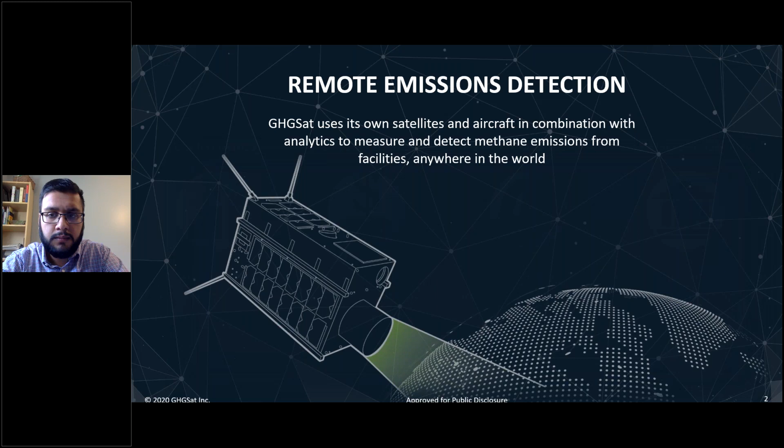As you can see on the screen here, we have a focus that lies between analytics and then our own satellite and aircraft-based platforms. But before I get too into those, maybe just a quick note on why measure methane emissions in the first place, to sort of set the stage.

First of all, we like to talk about economics. I think in most of these types of discussions, obviously if you're in an oil and gas type environment, you can capture the gas and put it into a usable system and sell it. But there's also other applications, things like landfills looking to capture gas from their landfills and either use it for injection or sometimes to power their vehicles, applications in agriculture, or even in some cases there's business centered around carbon credit generation. So there's a whole bunch of different economic aspects to why you might want to measure methane emissions.

Further to that, and on that same theme, is the idea of investors. So when we talk about large capital projects, oftentimes there is an increasing pressure for more disclosures as they relate to risks relating to carbon intensity and that type of thing, up front. And so that could be another reason.

And third, is health and safety. Unfortunately, every year there are events that happen where people die because of natural gas explosions, whether it be leakage into a basement in a rural area or say a coal mine explosion.

And the third idea about why we might want to measure deals more with regulations and the idea of where there's taxes and levies being applied in industry. There's certain value in actually making a measurement rather than say using an inventory-based approach to determining what emissions are.

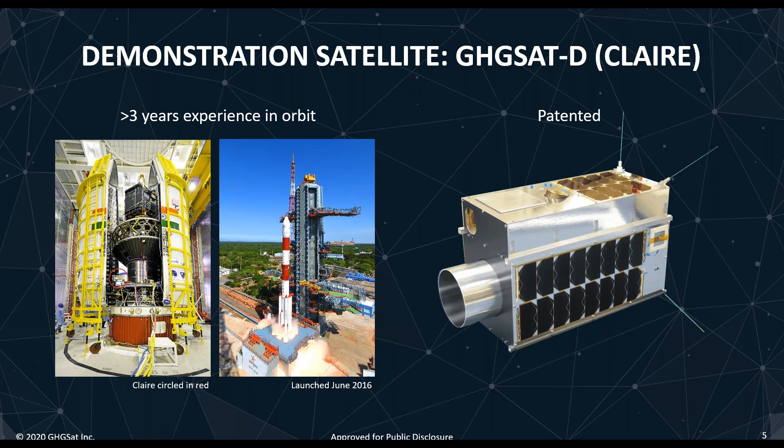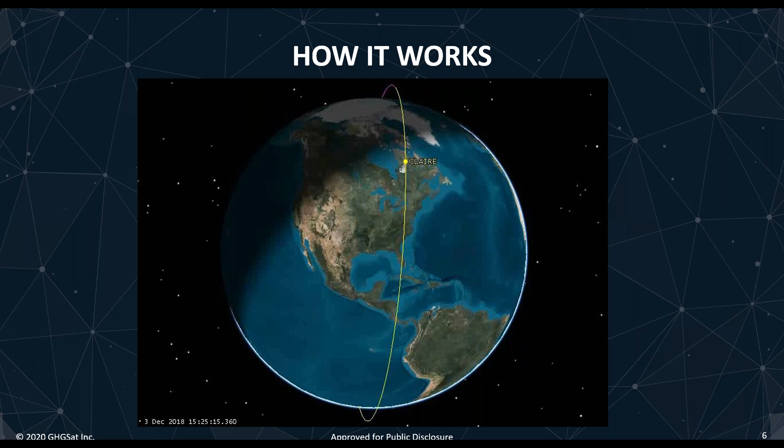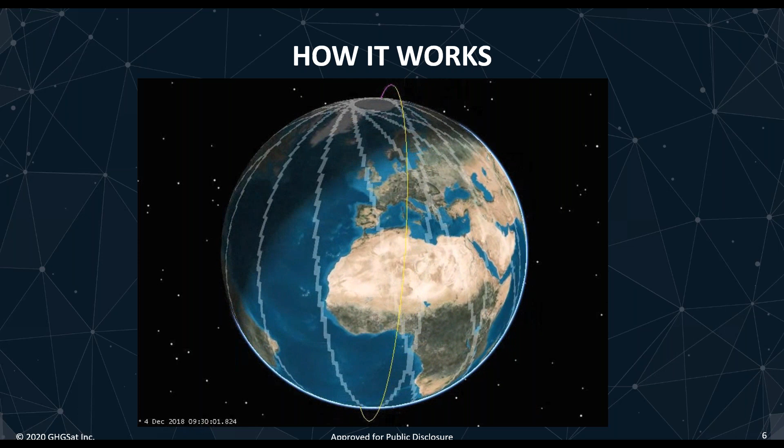Moving on from this, there's the satellite, but how does it actually work? I've got a quick animation here. We launched our satellite into about a 500 kilometer altitude orbit that runs north-south around the Earth. You can think of it as running north-south as the Earth spins west to east underneath it. That gives us access with the satellite to anywhere in the world once every 14 days or thereabouts on average. It depends a bit on where you are on the Earth, but once every 14 days is a good estimate.

With that capability, as we travel overhead of a particular site, we take basically a 20-second exposure image, you can think of it that way, and we capture a 12 by 12 kilometer area over that site of interest. The basic premise here is that of spectroscopy, the science that we're using, and we're using naturally reflected sunlight off the surface of the Earth, so it's a completely passive system.

But what really sets us apart in some ways is our resolution. GHGSat is able to attribute emissions to specific facilities, and with our demonstration satellite we're at about a 50 meter or better pixel resolution, and with the follow-on satellites we'll actually be improving that to 25 meters. I won't get too into the specifics of how it works, but happy to answer questions on that as we go, just in the interest of time.

What I will say is all the images, and I'll show some examples in just a moment, all use sort of a differential approach. What that means is that we take the average background level and subtract it from the image that we have, and that leaves us with what the enhancements are. We're then able to attribute those enhancements to particular facilities that we can see on the ground.

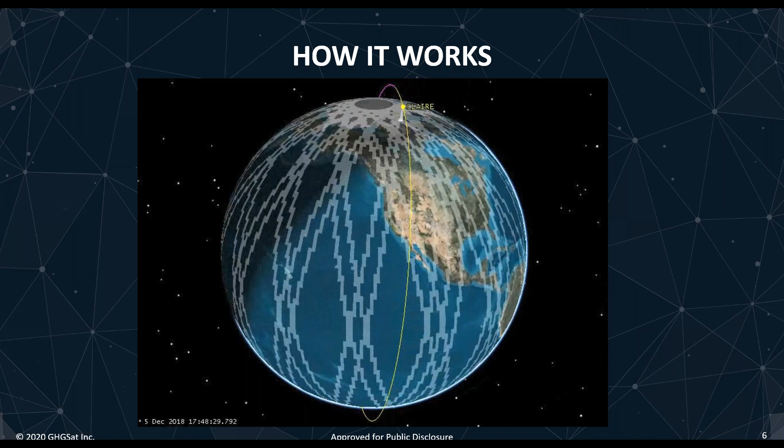Some key advantages of the aircraft are that we're now able to capture methane imagery at a spatial resolution of less than a meter, so extremely high spatial resolution with the airborne sensor. And we have some exciting results I can show you from that as we go forward.

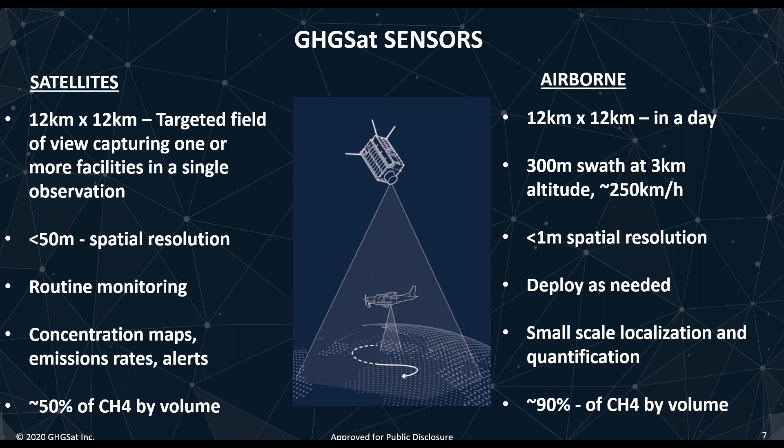That was arbitrary, just to give a sense. The idea is that the aircraft passes line by line over the area of interest and is able to survey, in this case, all of these oil and gas facilities over about the course of a day, while the satellite captures that same space but not necessarily at the same resolution. So while they're both looking for methane, they may be seeing different emission sizes, as well as giving different spatial resolution.

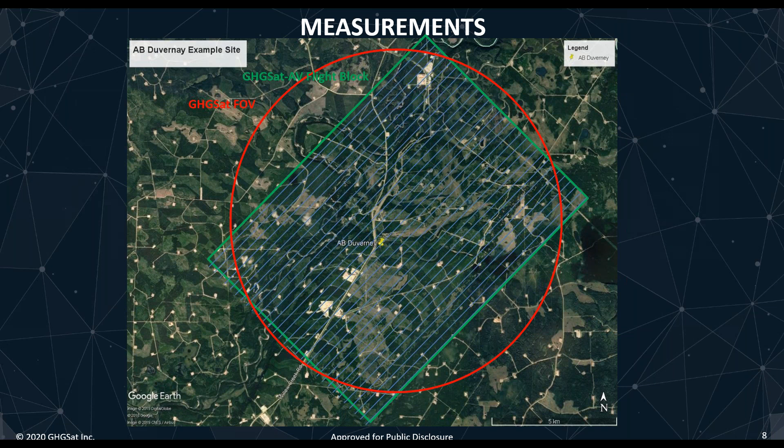What we're looking at there is the ventilated air methane coming out of that mine. They vent the methane from the underground mine for health and safety purposes, to avoid explosions and that type of thing. I think that's probably relatively intuitive.

As that breakdown happens, methane is released through that anaerobic decomposition, but it is then absorbed by the water in the reservoir. So what we're seeing, that highlighted hotspot of methane concentration, is actually downstream, seen in the spillway. When they spill the water out of the dam, that causes the water to degas, and we're able, in some cases, to measure those emissions.

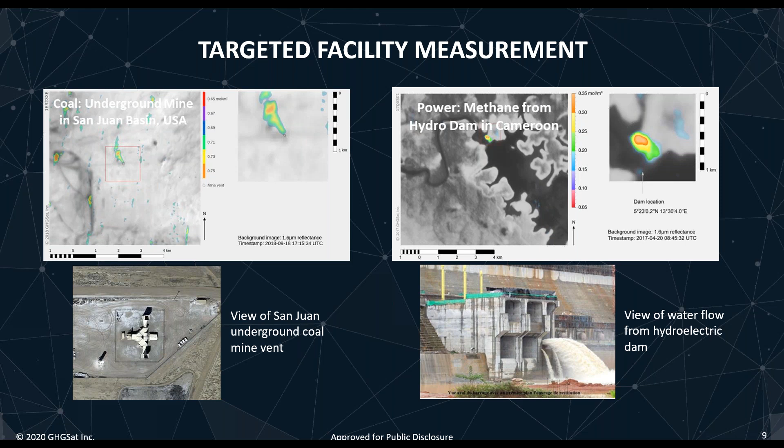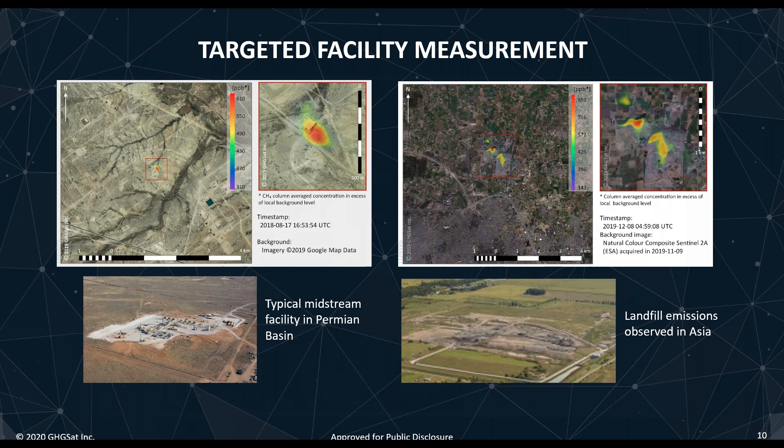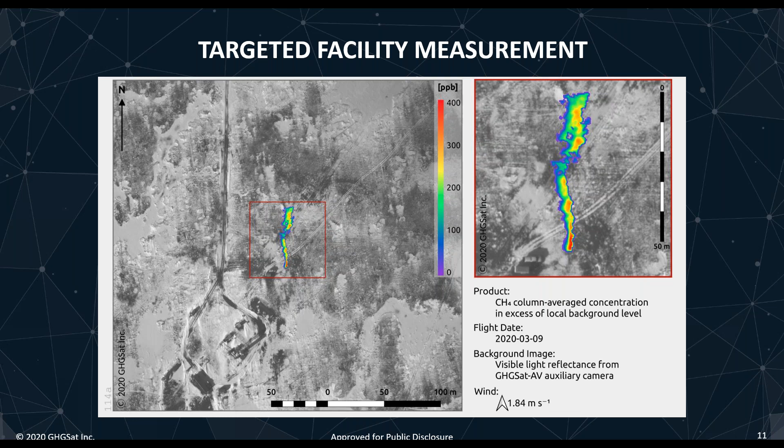So with all the sensors, that's great that we've got that. So what's next? And what's next for us is deployment. Like I said earlier, we'd hoped to share results from GHGSat C1 as part of this presentation. Unfortunately, that satellite has not yet launched. We had a combination of a rocket failure just ahead of us that delayed us, and then we unfortunately had COVID, which caused a further delay.

But the good news is our launch is scheduled for next Thursday, so it's very close and we're super excited about it. I do have links and all sorts of fun stuff available if anyone's interested in actually watching that real time or after. So that satellite's ready to go. It's in French Guiana, ready to launch.

The next satellite, Hugo—again we're sticking with the theme of naming after our children here—is going to launch in 2020. It's almost complete, but the key part here is both these satellites have really learned a lot from our demo satellites, with improvements in resolution and detection threshold being key.

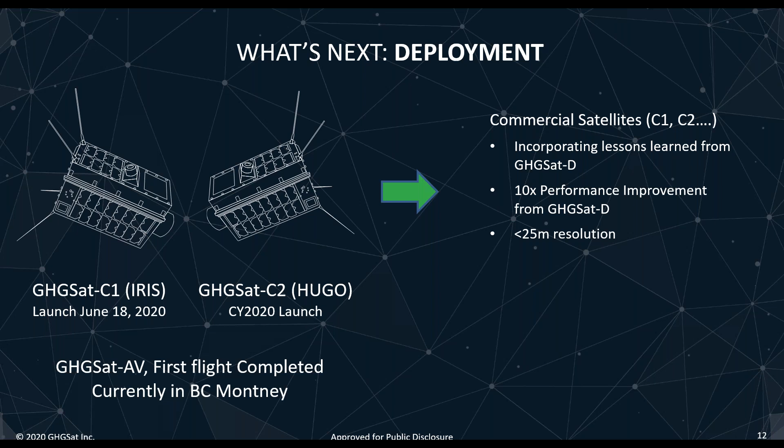And where I started as well was with the aircraft. Our aircraft today is actually out in the BC Montney on one of its first deployments. We did our first flights back in December, but this is one of our first deployments for the aircraft. Like I said earlier, it's got even better detection capabilities than those satellites, of course with the trade-off of getting it to the site and operating costs.

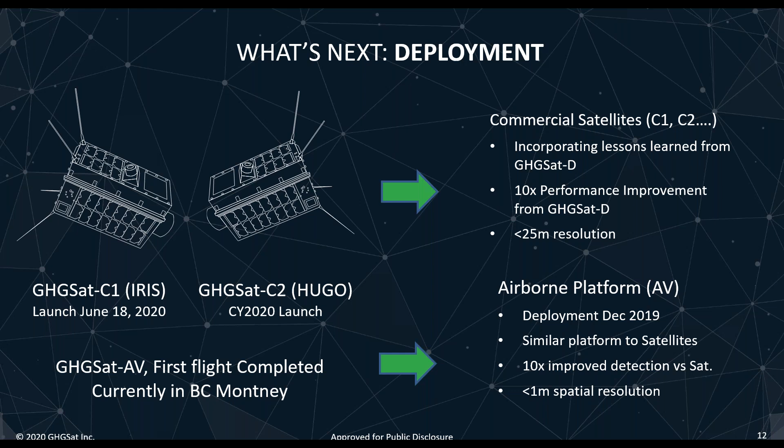What we did was observe these coal mines over the course of about a 2-year window with GHGSat-D, the demonstration satellite. We took those images and averaged them together, and we also rotate for the wind direction so that the wind directions all line up, with the convention being that wind comes from north to south. If we took these 20 images and put them together, that allows us to tease out smaller enhancements of methane concentration on an annualized basis.

It also allows us to reduce the background noise. With that, we're able to determine measured estimates of lower emissions rates than we can detect in a single pass, as well as determine, within reason, what the actual emissions rates of certain facilities are over the course of a year.

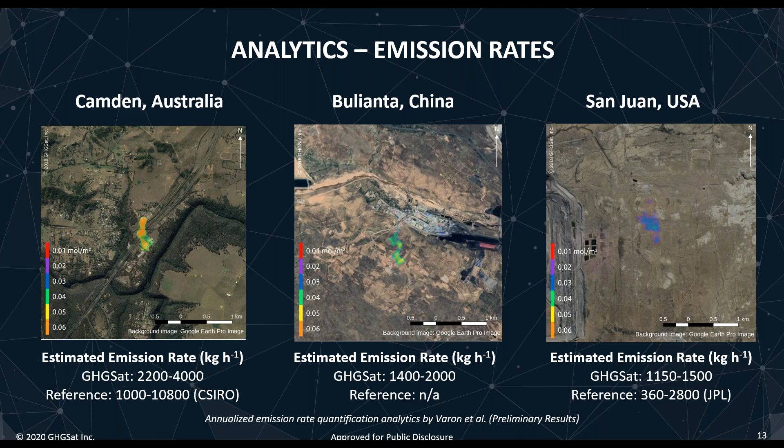Now, that's one of the analytics examples. Maybe a more recent and more exciting one to talk about is from this year. These analytics allow us to provide coverage over very large areas at high frequency, with the trade-off of spatial resolution. One of the things we're doing is looking at data that's publicly available.

That TROPOMI instrument has the potential to capture the whole world once a day. The difference is that the pixel size is roughly 7 kilometers by 7 kilometers, so it's relatively coarse resolution, but it gives us very regular intervals. We can take that publicly available data and put it together to do some interesting things.

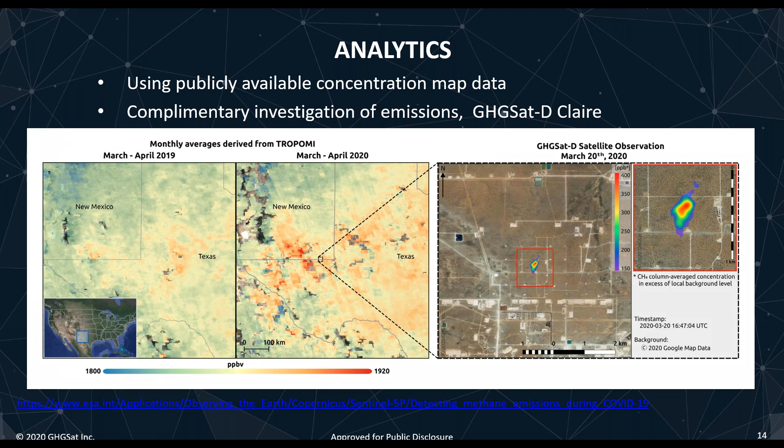But it doesn't stop there—there's more we can do than just take publicly available concentration data. To round out this idea, we can ingest all sorts of publicly available data, including things like visual change detection, weather, flaring, production data, locations of sites, infrastructure, all that type of thing. We can put that into our analytics engine to make intelligent predictions about where to target our satellite.

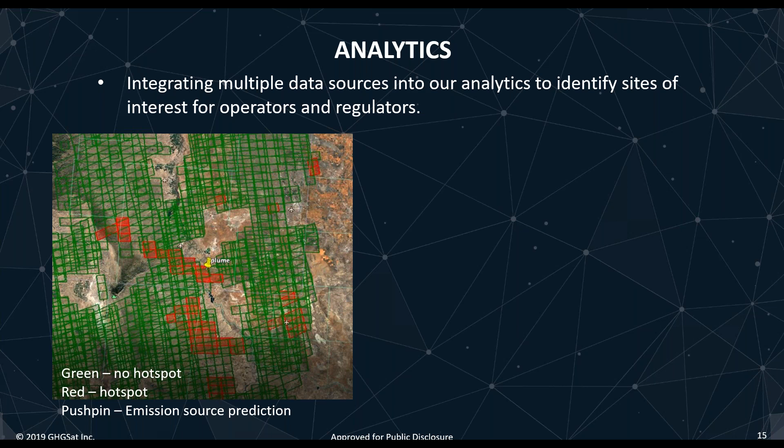In the image you see up in front of you right now, there's a series of red squares distributed throughout, but applying some of the algorithms and capabilities we've developed in-house, you'll see right in the center a push pin that says plume. We had estimated a good chance of finding something there if we took a look, and sure enough, when we did, we were able to find what we believe was actually an unlit flare in that particular case.

So really how this all comes together is it allows us to look from a different perspective at methane emissions, over a very large area at a coarse resolution with high frequency, and then apply that to our fine spatial resolution satellites, and even finer aircraft resolution, which we can deploy on an as-needed basis. Overall, this builds a tiered approach that we can apply across a bunch of different industrial sectors, especially as the analytics continue to improve with the learnings we have as we implement this.

In particular, at the moment, these analytics are of considerable interest to regulatory bodies, as well as to industry when they're managing a large number of assets that are spatially distributed.

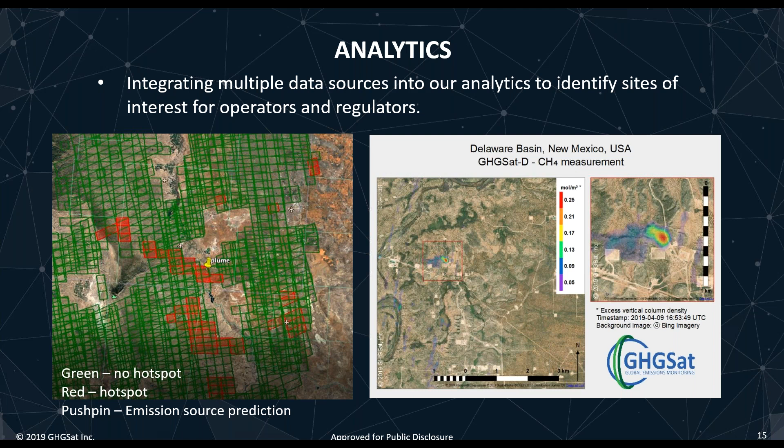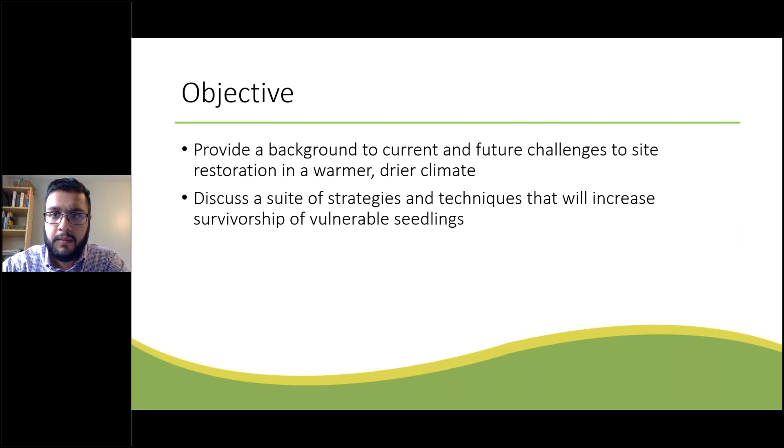I'm gonna try giving them a shout. Thanks, Joe. Good idea. Why don't we go to Anthony's presentation? Why don't we go to the next presentation, and we'll circle back to Jeff? Sounds good, Anthony. Hope you didn't grab a coffee. If you don't mind, Anthony, we're gonna toss it over to you, and we'll come back to Jeff technology permitting.

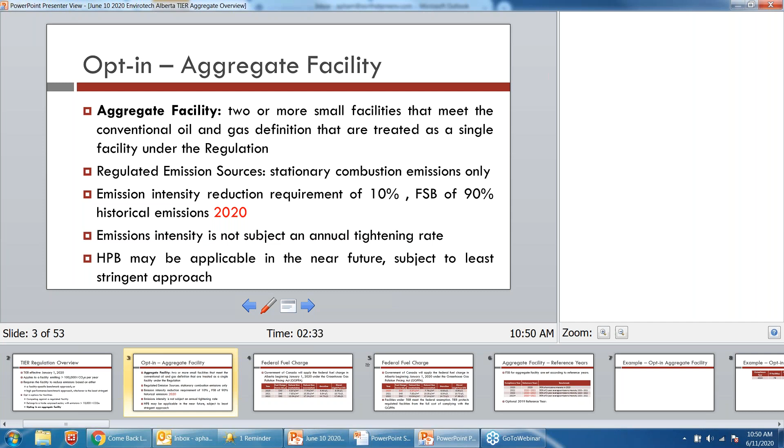The emissions intensity is not subject to an annual tightening rate, and a high performance benchmark may be applicable in the near future and subject to the least stringent approach.

So you might ask yourself, why would a company decide to opt in as an aggregate facility? The reason is, under the Greenhouse Gas Pollution Pricing Act, the Government of Canada applied the federal fuel charge in Alberta starting this year, and this translates into a fuel charge of $30 a ton on all fuels. And specifically for natural gas, this equates to 5.87 cents per meter cubed.

However, facilities regulated under the TIER regulation meet the federal exemption, and TIER regulated facilities are protected from the full cost of complying with the federal act, as long as the facility complies with the TIER regulation. It should be noted that TIER meets federal equivalency because the compliance cost for both programs is set at $30 a ton in 2020.

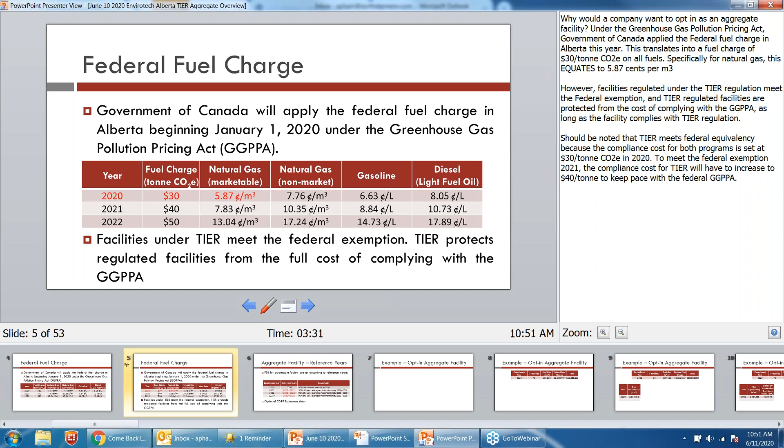And to meet the federal exemption for 2021, the compliance cost for TIER will have to increase to $40 a ton to keep pace with the federal act. As I mentioned, a regulated facility is protected from the Greenhouse Gas Pollution Pricing Act as long as it adheres to the TIER regulation. And the aggregate facility is required to maintain an emissions intensity reduction requirement of 10%.

The reference years for the aggregate facility will be 2020 in the 2020 compliance year. Alberta Environment and Parks recently discussed that the reference years to be used are still to be decided. However, it is anticipated that the 2021 compliance year will be the 2-year average of 2020 and 2021, and for the 2022 compliance year and onward, it will be the 3-year average of 2020 to 2022.

And if, for example, a company has already significantly invested in their assets for the purpose of emissions reduction, and believe 2019 would be a more suitable reference year, the company can apply to use 2019 as the reference year.

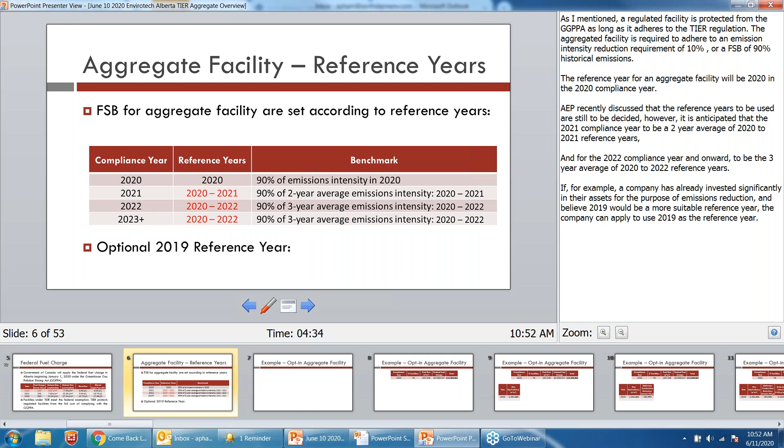I have an opt-in example for a company interested in opting into the TIER program as an aggregate facility. A few facts about this company: during 2020, the company operated 79 facilities and consumed 187,000 decks of natural gas.

With a fuel charge of 5.87 cents per meter cubed under the Greenhouse Gas Pollution Pricing Act, the facility will have to pay just under $11 million.

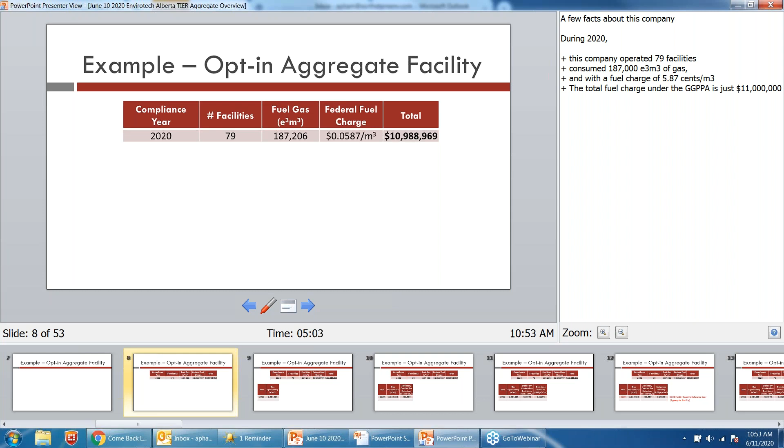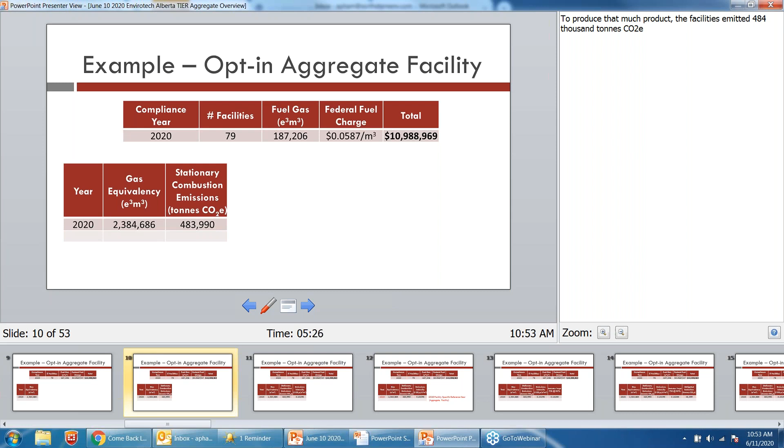And to compare with the tier program, we'll look at the production metrics for this company. During 2020, the company produced an equivalent gas product of just over 2.3 million decks of natural gas. To produce that much product, the facility emitted 484,000 tons of carbon dioxide equivalent from stationary combustion emissions only, producing an emissions intensity of roughly 0.2.

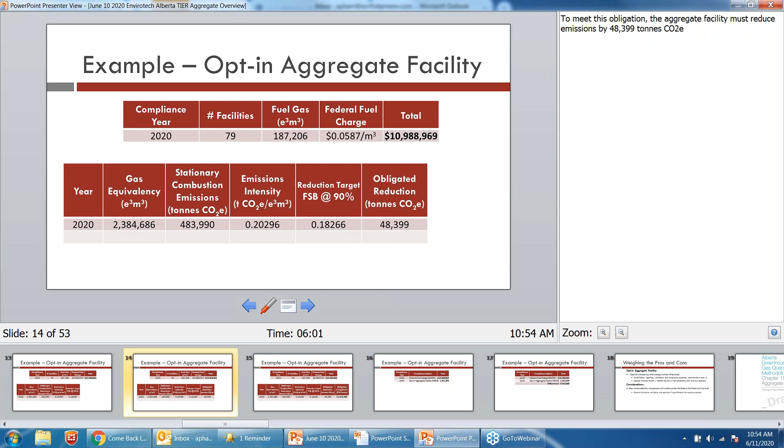You may recall that the 2020 compliance year will also have a facility-specific reference year of 2020, with the reduction target set at 10% of the facility-specific benchmark, or 90% of historical emissions. Then the emissions reduction obligation is 0.18. To meet this obligation, the facility must reduce emissions by approximately 48,000 tons. And after applying the true-up obligation of $30 a ton, the facility will have a compliance payment of roughly $1.4 million.

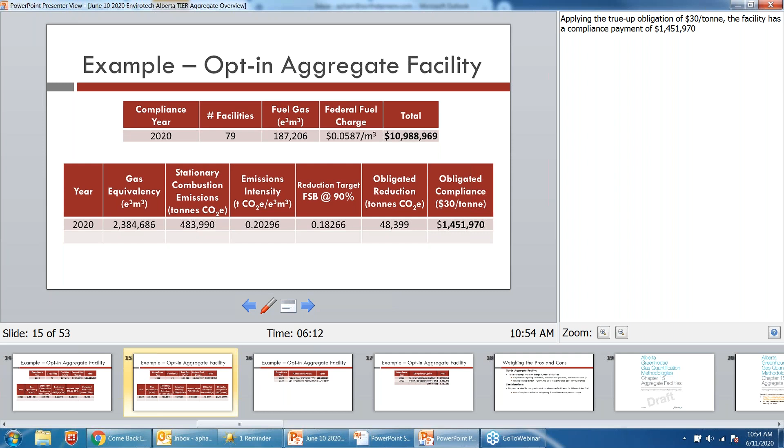So to recap, under the federal fuel charge option under the Greenhouse Gas Pollution Pricing Act, the facility may have to pay $11 million, but by opting in as a tier aggregate facility, the facility would only pay $1.4 million, for a grand difference of $9.5 million.

So whether a company should opt in as a tier aggregate facility really boils down to the specific circumstances of the company. It would be ideal if the company had multiple facilities, as the reporting and verification is simplified, reducing administrative costs and compliance costs. But if the company is small with not many facilities, this example may not be good, as reporting and verification may cost more than the example provided.

The rest of this presentation will focus on the draft quantification methodologies released by Alberta Environment and Parks on May 29th of this year. AEP also included a few announcements, including a change to the benchmark year for conventional oil and gas facilities from 2020 to 2021.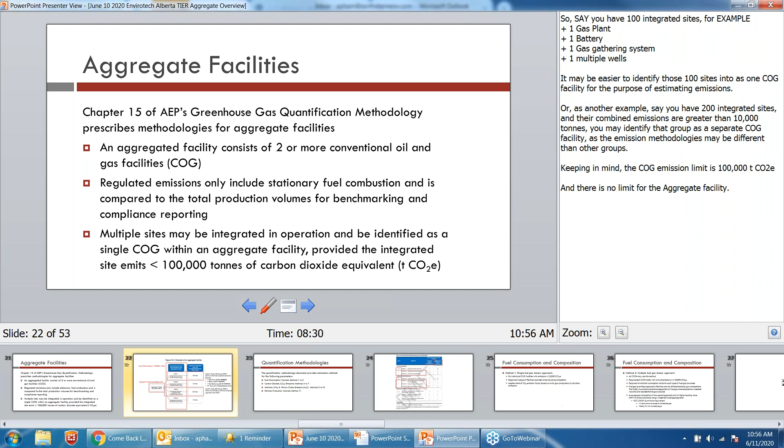So say, for example, you have 100 integrated sites consisting of a gas plant, a battery, a gas gathering system, and multiple wells. It may be easier to identify those sites as a single COG for the purpose of estimating emissions. Or as another example, you have 200 integrated sites and their combined emissions are greater than 10,000 tons. You may identify that group as a separate COG, as the emission methodologies may be different in other groups. Keeping in mind that the COG emission limit is 100,000 tons of carbon dioxide equivalent, and there is no limit for the aggregate facility.

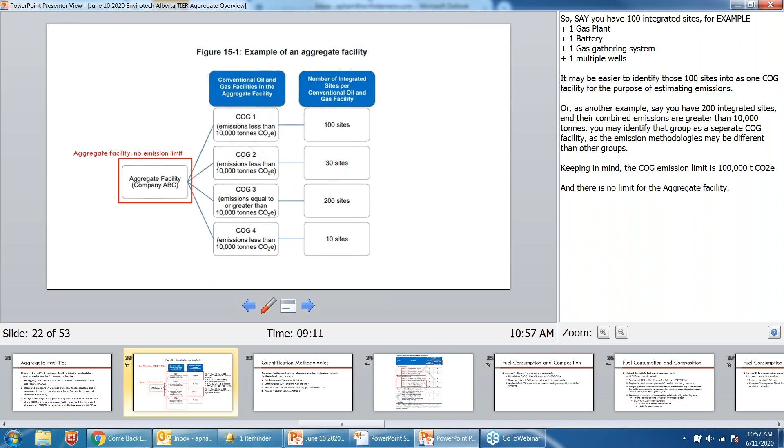The quantification methodology document provides estimation methods for the following parameters: fuel consumption volumes, carbon dioxide emissions, methane and nitrous oxide emissions, and Petrinex production volumes.

The quantification methodologies in this chapter are classified by levels of stringency and accuracy, with the lowest at level 0 and the highest at level 1. The minimum levels required for both benchmarking and compliance reporting are provided in Alberta's standard for developing benchmarks and the standard for completing greenhouse gas compliance and forecasting reports.

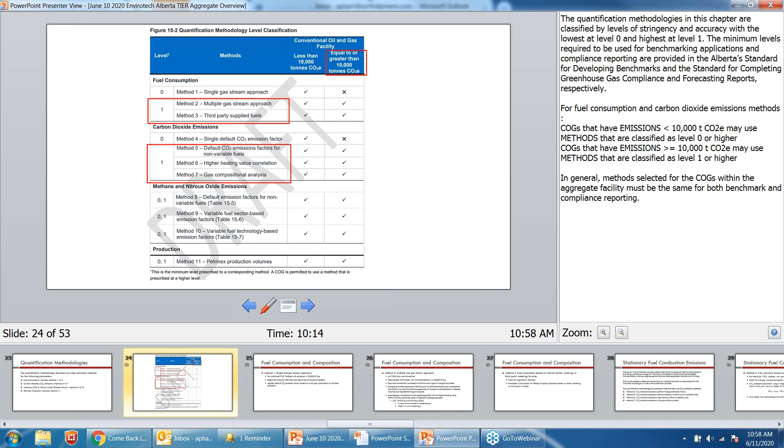For fuel consumption and carbon dioxide emission methods, COGs that have emissions less than 10,000 tons may use the methods classified as level 0 or higher, and COGs that have emissions greater than 10,000 tons may use methods classified as level 1 or higher. The methods that are selected for the COGs within the aggregate facility must be used for both benchmark and compliance reporting.

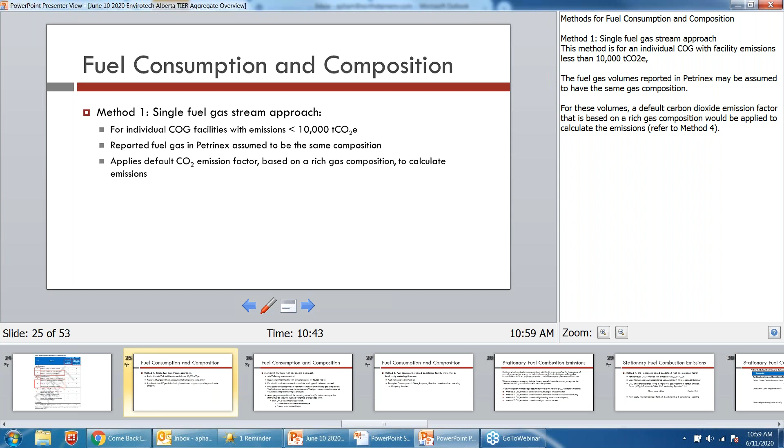Fuel consumption and composition, Method 1, also known as the single fuel gas stream approach. This method is for an individual COG with emissions less than 10,000 tons, and the fuel gas reported in the Petrinex system may be assumed to have the same gas composition. For these volumes, a carbon dioxide emission factor based on a rich gas composition would be applied to calculate the emissions.

Method 2, a multiple fuel gas stream approach. While all COGs may use this method, COG facilities with emissions greater than 10,000 tons of carbon dioxide equivalent are required to maintain fuel consumption totals for each type of fuel gas consumed. As the fuel gas quantities reported in Petrinex are not differentiated by gas compositions, the facility must demonstrate the separation of fuel gas streams based on metered volumes and representative gas analysis.

The average gas composition of the reporting period or higher heating value must be calculated using a weighted average approach, keeping in mind that the federal ECCC greenhouse gas reporting program requires at least 2 semi-annual analyses for marketable natural gas, and weekly for non-marketable natural gas.

There's been some discussion with oil and gas companies that for weekly sampling, the sampling rate is a bit unreasonable, costly, and not practical. It also differs from Alberta's own Directive 17, and companies have been relaying these comments to Alberta Environment and Parks.

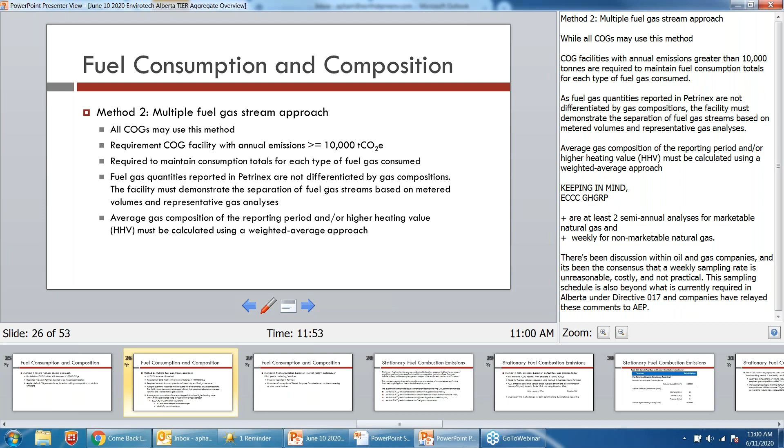Method 3, fuel consumption based on internal facility metering or third-party invoicing. These are for fuels not reported in Petrinex. For example, a third-party supplier of diesel, propane, or gasoline who internally meters themselves or provides a third-party invoice.

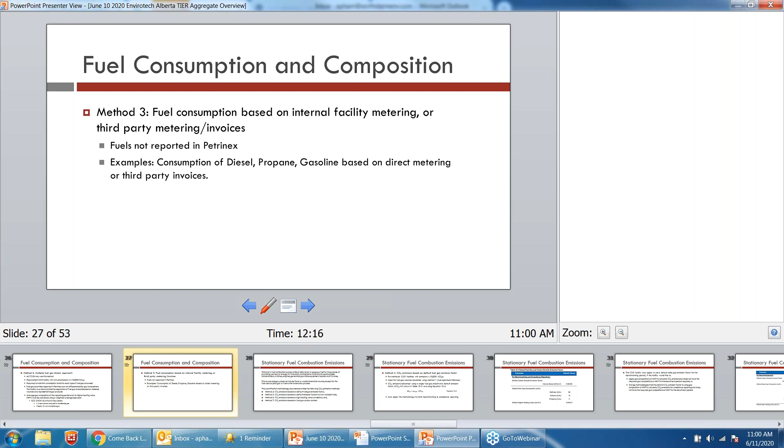Stationary fuel combustion provides the heat or energy for industrial, commercial, or institutional use. Examples may include a boiler, an engine, a turbine, but the source category doesn't include the flare or waste incineration sources, except for the fuel gas used as pilot gas or fuel used in the incineration process. The methods discussed in this part of the chapter deal with variable and non-variable fuels and are based on either the default emission factor, the high heating value correlation, or the fuel gas carbon content.

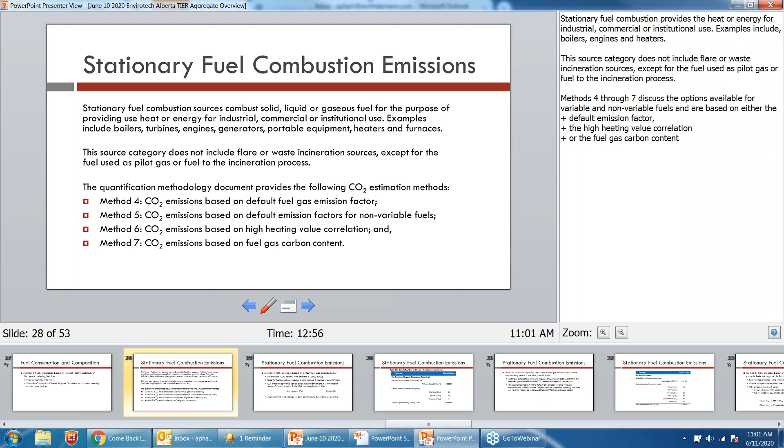For Method 4, the carbon dioxide based on default fuel gas emission factor. This method is for individual COGs with emissions less than 10,000 tons, and it's used for fuel gas volumes calculated using Method 1, or the fuel reported in Petrinex. The CO2 emissions are calculated using a single fuel gas stream and default emission factor shown in Table 15.3, using Equation 15.4 shown here. The COG must apply this methodology for both benchmarking and compliance reporting.

Table 15.3 shows the default carbon dioxide emission factor, as well as the default rich gas composition and higher heating value.

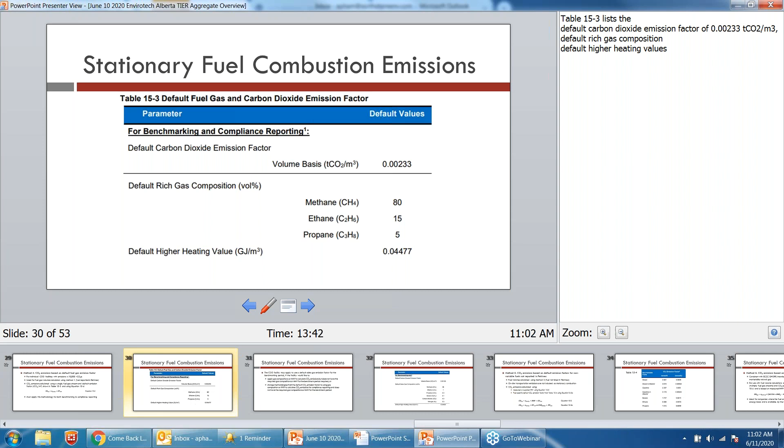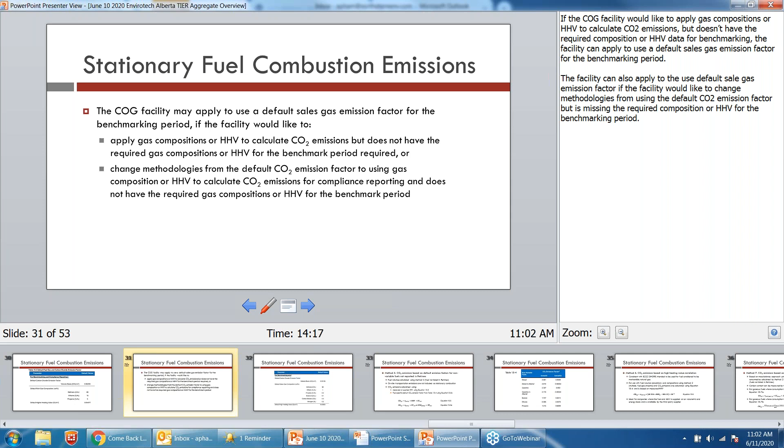If the COG would like to apply gas compositions or higher heating values to calculate their CO2 emissions, but doesn't necessarily have the required composition or higher heating value data for benchmarking, the facility can then apply to use a default sales gas emission factor for the benchmarking period. Similarly, if the facility would like to use a default sales gas emission factor and would like to change from using methodologies using the default CO2 emission factor, they can do so as well if they are missing the required composition or higher heating value for the benchmarking period. Table 15.3 also contains the default sales gas emission factor, the rich gas composition, and default higher heating value.

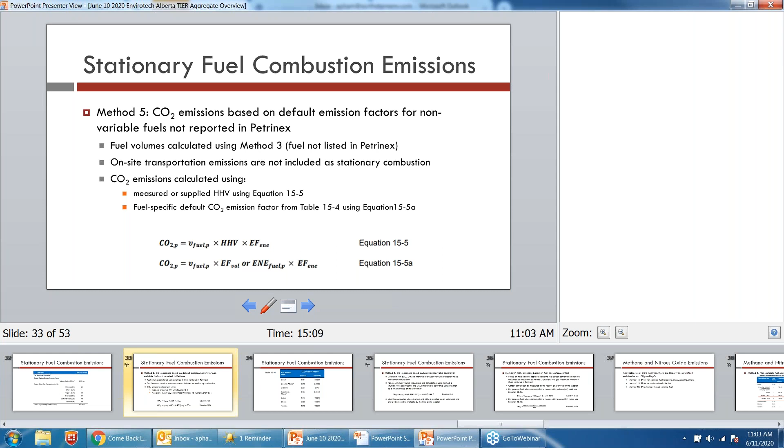Method 5, the CO2 emissions based on default emission factors for non-variable fuels not reported in Petrinex. These are for fuel volumes calculated using Method 3. The chapter reiterates that on-site transportation emissions are not included as stationary combustion, not included in that category. The CO2 emissions are calculated using either a measured or supplied higher heating value using Equation 15.5, or a fuel-specific default carbon dioxide emission factor from Table 15.4 using Equation 15.5a. Table 15.4 lists the emission factors for non-variable fuels, listed either on a volumetric or energy basis.

Method 6, the carbon dioxide emissions based on high heating value correlation, consistent with ECCC's greenhouse gas reporting program. This method is for use with fuel volume calculations and compositions using Method 2, and CO2 emissions are based on measured higher heating value using Equation 15.6. This method would be ideal for companies where the fuel is supplied on a volumetric or energy basis, and the higher heating value is readily available by the third-party supplier.

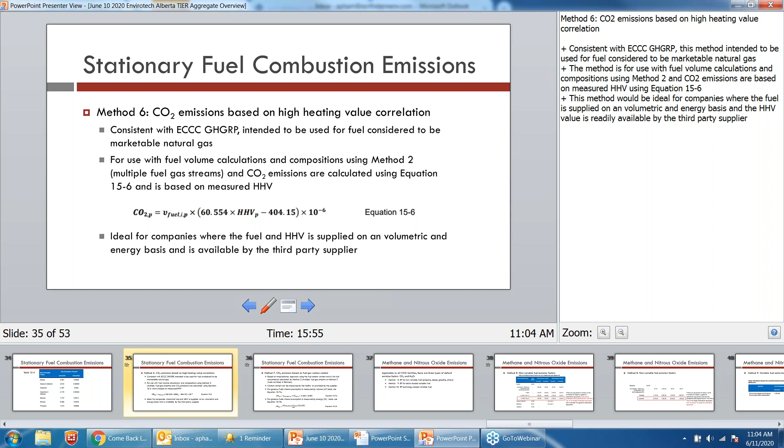For method 7, carbon dioxide emissions based on fuel gas carbon content. This method is based on a mass balance approach using the fuel carbon content. It is for fuel consumed as calculated using method 2 or method 3. The carbon content can be measured by the facility or provided by the supplier. For gaseous fuels where consumption is measured by volume, you can use equation 15.7a, or if the consumption is measured on an energy basis, you can use equation 15.7b.

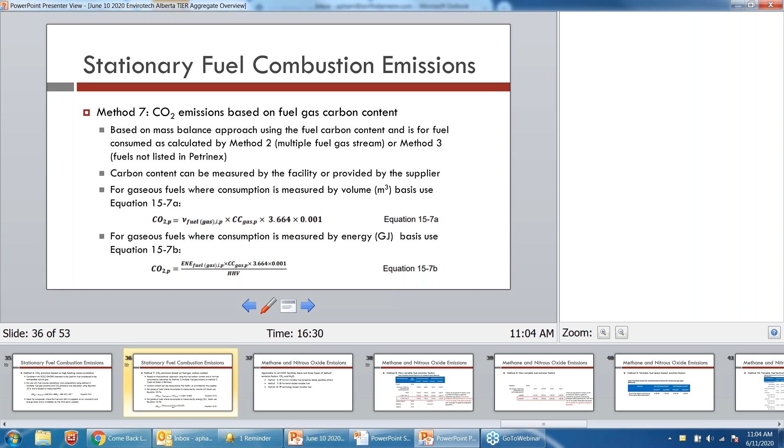For methane and nitrous oxide emissions, methods 8 through 10 are applicable to all COG facilities, and they are based on either the fuel itself, sector-based variable fuel, or technology-based variable fuel.

I think someone may not be muted. Someone has their mic on still in the background. Appreciate if you turn it off. Thank you.

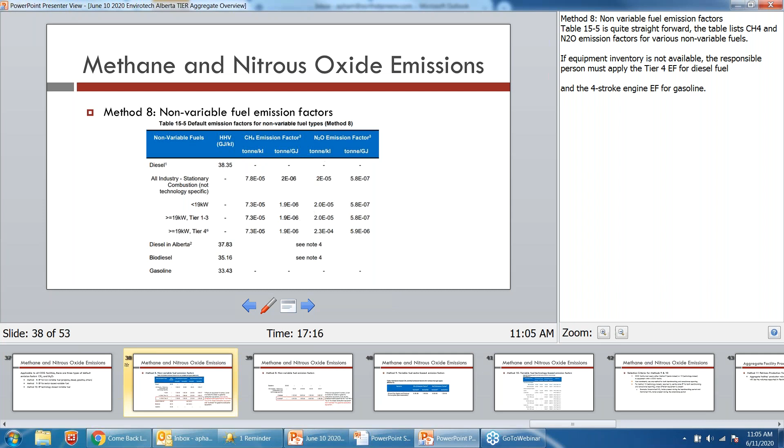For method 8, non-variable fuel emission factors, the chapter lists table 15.5, and it's quite straightforward in that the table lists methane and nitrous oxide emission factors for various non-variable fuels. With the caveat, though, that if an equipment inventory is not available, the responsible person must apply the tier 4 emission factor for diesel fuel. And for their inventory of gasoline equipment, they must apply the 4-stroke engine emission factor for gasoline sources.

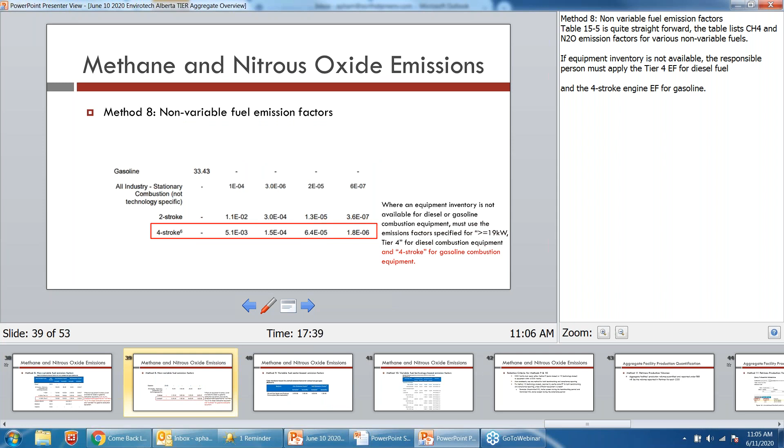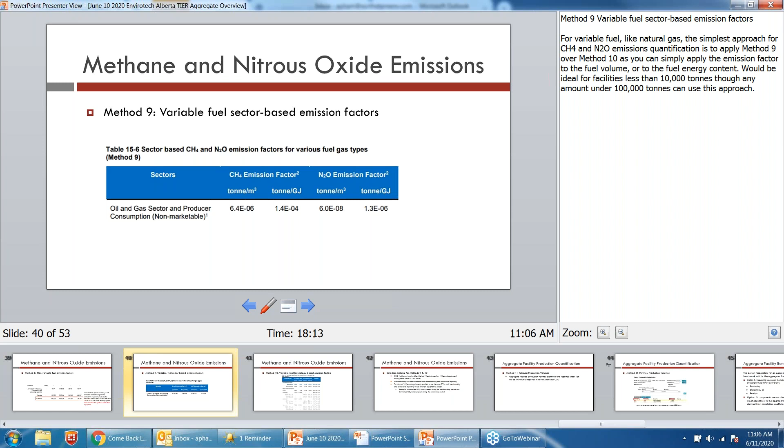For method 9, variable fuel sector-based emission factors. For variable fuel like natural gas, the simplest approach would be to use the methane and nitrous oxide emission factors for emissions quantification. The simplest approach for methane and nitrous emissions quantification is to apply method 9 over method 10, as you can simply apply the emission factor to the fuel volume or the energy content. This would be ideal for facilities with less than 10,000 tons, as you can streamline the approach, but any amount under 100,000 tons can use method 9.

Method 10, variable fuel technology-based emission factors. The COG may consider using technology-based emission factors in the table shown here if more accurate emissions are warranted, or if the emissions for the COG are approaching the standalone reporting threshold of 100,000 tons. This method may be cumbersome though, as the fuel or energy content must be allocated or metered to the specific technology types.

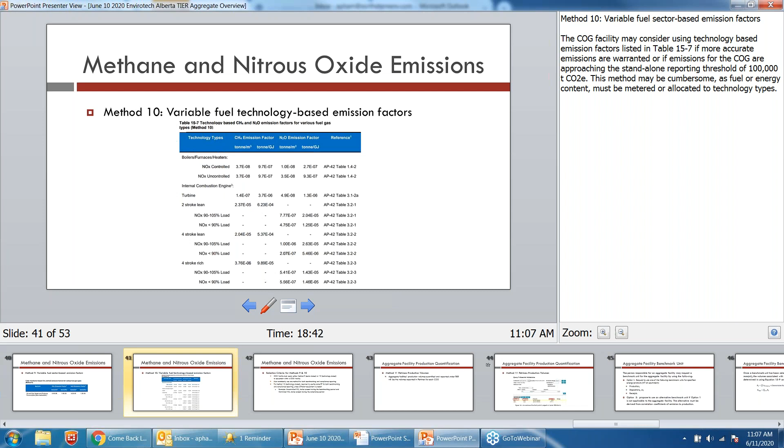For methods 9 and 10, the following selection criteria apply. The COG must apply either method 9 or method 10 to equipment within the facility, and they must consistently use that method for both benchmarking and compliance reporting. For method 10, they're required to use the same emission factor for both benchmarking and compliance reporting, unless different equipment is present. For example, an uncontrolled NOx boiler is present during the benchmarking period, and during the compliance period, they made an upgrade, and now the boiler is NOx controlled.

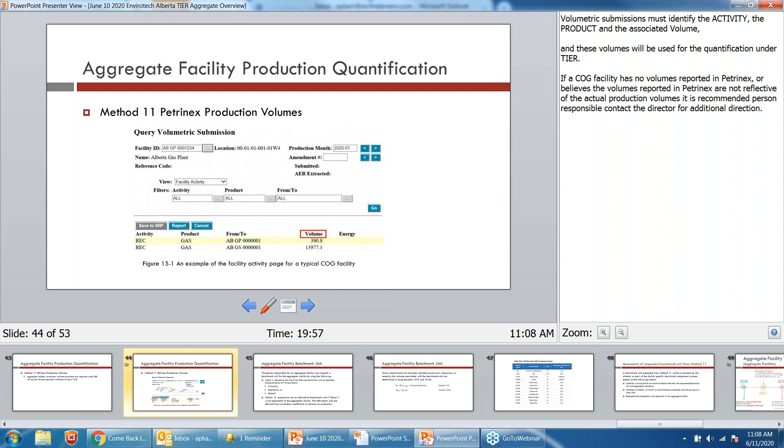Method 11, Petrinex production volumes. The aggregate facility's production volumes quantified and reported under tier will be the volumes reported in Petrinex for each COG. The volumetric submissions must identify the activity, the product, and the associated volume, and these volumes will be used for the quantification under tier. If the COG has no volumes reported in Petrinex, or believes the reported volumes in Petrinex are not reflective of the actual production volumes for their company, it is recommended that the responsible person contact the director for further direction.

The responsible person for an aggregate facility may request a benchmark unit for the aggregate facility using one of two options. They can request to use the following benchmark units for specified energy products: either production, dispositions, or receipts. Or option 2, they can propose to use an alternative benchmark if option 1 isn't applicable. However, in the interest of time, we will only discuss option 1 today, though the draft document does go into detail on how to develop an alternative benchmark.

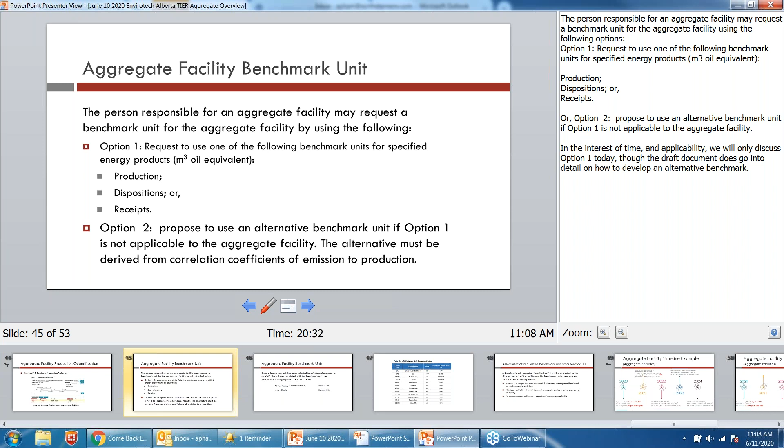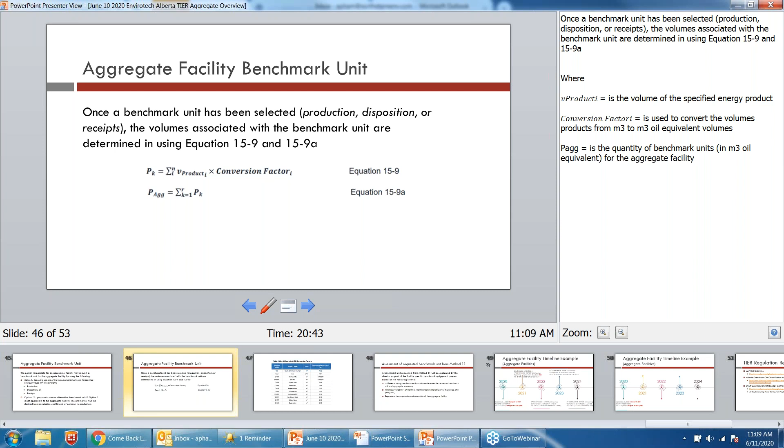Once a benchmark has been selected, the volumes associated with the benchmark unit are determined using equation 15.9 and 15.9a. And the conversion factors associated with the benchmark unit are listed here in table 15.9. A benchmark unit requested from method 11 will be evaluated by the director as part of the facility-specific benchmark assignment process, based on the following criteria: whether the benchmark achieves a strong month-to-month correlation with the aggregate emissions, whether the benchmark minimizes variability of month-to-month emission intensities, and whether it represents the composition and operation of the aggregate facility.

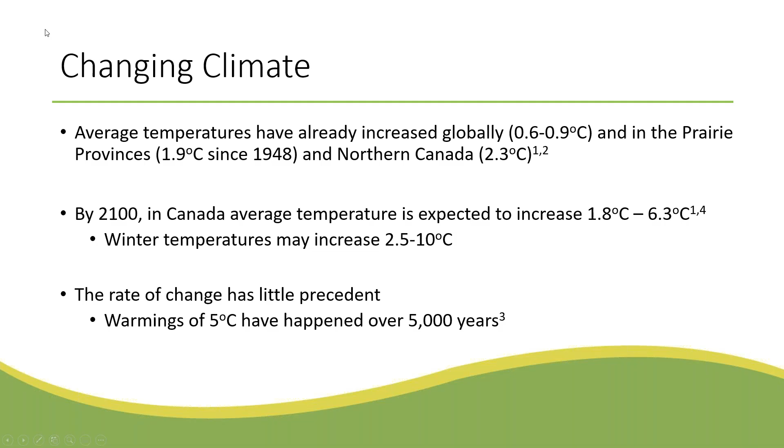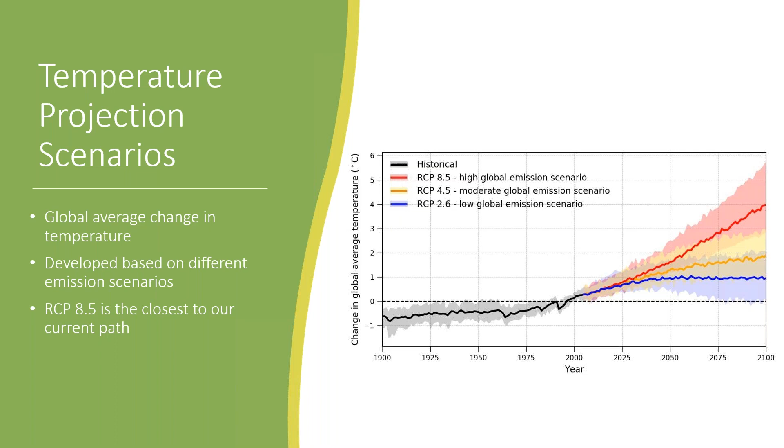In terms of where we would end up, it's hard to really base this on things that may be uncertain or dependent on policy decisions, but basically the closest scenario to where we're headed is the RCP 8.5, the red bar. That's more in line with the amount of emissions we currently produce and are likely to produce into the future. This is global average temperature, I should mention - in Canada it tends to be a bit higher due to a number of factors. Based on our current trajectory, we are looking at a significant increase in global average temperature.

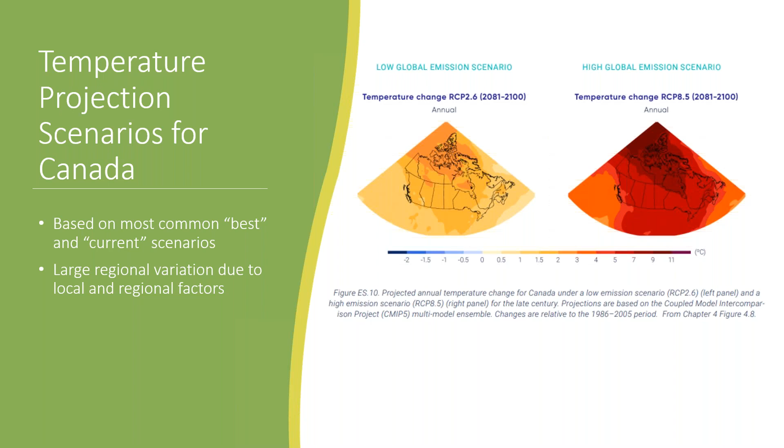Now, I've just really been talking about climate, right? So what is climate? It's the average of temperatures and precipitation - the average of what happened in a day, what happened in a week. There's a lot of variability in that, and I've just been talking about the averages.

What is going to happen is that the weather events that make up that average are going to be a lot further from the average. So you're going to have these extremes - extreme heat waves, extreme cold snaps. For instance, Edmonton currently has on average about 3.8 days above 30 degrees Celsius. In the next 60 years, that's going to increase to between 16 and 26 days above 30 degrees Celsius.

As mentioned, there will also be increased cold snaps. The intensity of precipitation is going to increase. From what I've seen, the total amount of precipitation isn't going to change significantly, but the intensity of the events is going to. These extremes are actually the predominant factors that shape vegetation communities, more so than averages. So climate has a pretty significant role, but there's a lot to speak to. The actual changes in vegetation communities come from the extremes, and as we see more of these extremes, plants are going to be further stressed.

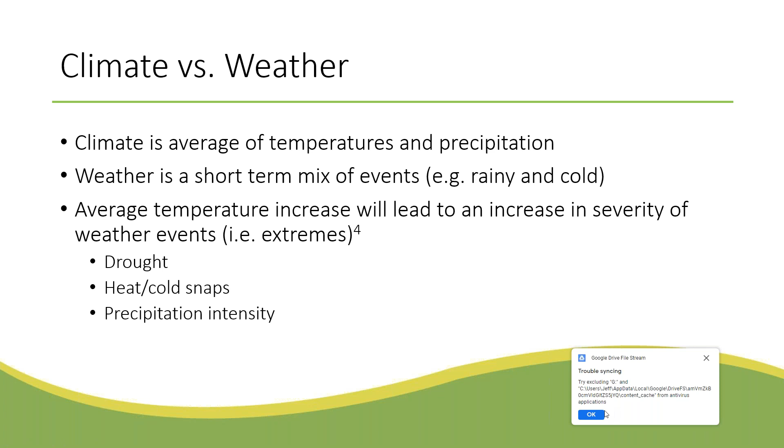And sort of how does that affect plants? So plant phenology, that's the timing of life cycle events. They're adapted to both climate, weather extremes, and photo period, the day length. And that day length has traditionally been linked fairly much to the seasonality in the climate, and they function as part of that. So plants, some are more adaptable to changes than others.

Some are a bit more tolerant, like they're more tolerant to the stressors that come when weather events are out of sync with traditional climatic patterns. But others are more able to respond by changing their timing of events to weather.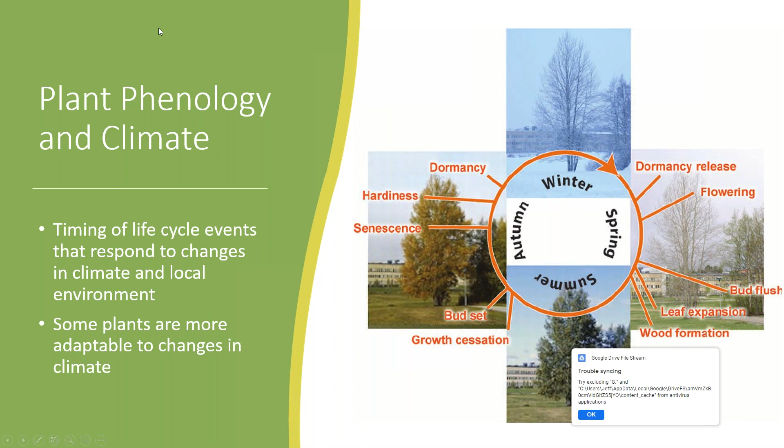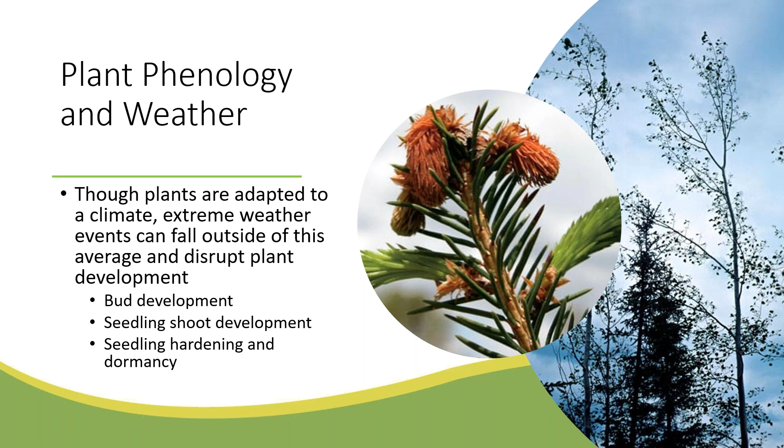The thing is, though, regardless of—well, one is we don't know how much change is going to happen yet—but when plants find that their phenology falls outside of these traditional patterns, weather events can really significantly disrupt development of buds, putting on new foliage, putting on new shoots, going into dormancy. And when that happens, you can have loss of plant health, plant dieback, total death of mature plants, and actually significant change of plant communities if these changes in weather and climate are significant and take place over a longer period.

A little bit of background in terms of how plants are adapted to their local conditions, and how that actually has some genetic aspects to it. So this is the seed zones in Alberta, and from a basic element, these are biogeoclimatic zones where, for instance, a white spruce from one of these areas is going to be somewhat genetically dissimilar from one of the adjacent zones, based on the climate in the area. It is somewhat genetically adapted to this area.

So if I was looking to deploy white spruce in the top darker green seed zone, the seed would have had to come from that area. This is actually legislated—I mean, this is just for public lands—but the idea is that spruce's genetic material is adapted to that specific area. So that does create limits in case we're looking at moving things in anticipation of future climates.

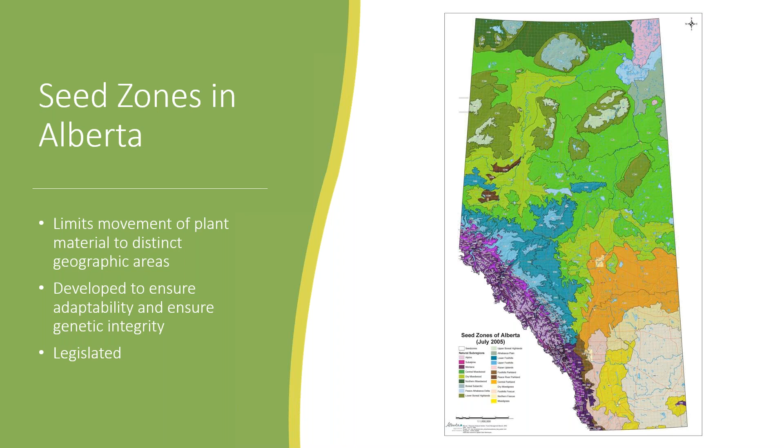Now, looking at how does that all come down to a reclamation site? A lot of what I've spoken about is more just looking at things from a natural perspective—what happens with natural succession, natural regeneration. In a reclamation site, there's different makes and models, right? There's different amounts of preparation that have happened, different amounts of how long events have happened.

But in a lot of reclamation sites compared to natural sites, significant things: there's less shelter, so there's less roughness on the surface. Wind can move a lot quicker, things can dry out a lot quicker. There's less organic matter, LFH layers, so there's a little bit less moisture holding capacity. More competition for seedlings, so there's going to be less light, nutrient, and moisture available for seedlings, and these are often more compact than natural sites, meaning it's harder for a seedling's roots to spread out and get the moisture and nutrients they need to survive.

Now, that's sort of the background in terms of what are some options to increase the survivorship, the likelihood of reestablishment of vegetative cover. One thing I want to highlight is that, as I mentioned before, there's not a lot of certainty in terms of how significant the change is, so none of these are things we can guarantee. However, a lot of these methods are things that myself, my colleagues, and colleagues in academia and industry have been employing for a number of years in stressful sites that have a lot of the traits of where we're looking at things might end up climatically. So I would say these are a pretty good bet for working in a number of the scenarios we're likely to encounter.

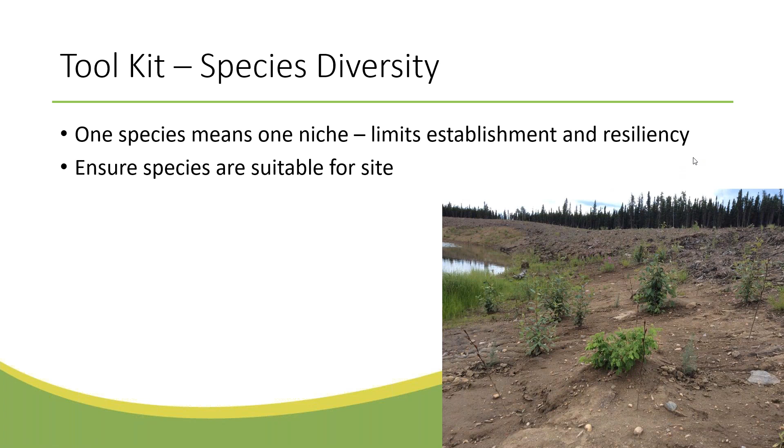So genetics is a pretty important one. I already kind of alluded to that with the seed zones. As mentioned, there's a bit of a limit in terms of how much you can move genetic material, although you can get permits with appropriate justification for moving between adjacent seed zones.

The other interesting thing is that there are a number of species whose timing of their life cycle, their phenology, is a little bit more linked to climate than it is to day length. So for instance, trembling aspen, balsam poplar, white birch, beaked hazel, they're going to be more responsive to what's actually happening, so they might not have bud flush until it's much warmer out. Using more of those species can be quite helpful.

One interesting tool we have at our disposal is use of improved seed. Over a number of decades, there have been breeding programs of various conifer species throughout the province, using material from multiple seed zones, which has allowed seed to be adapted to these multiple seed zones and thus likely have a much greater environmental range of tolerances.

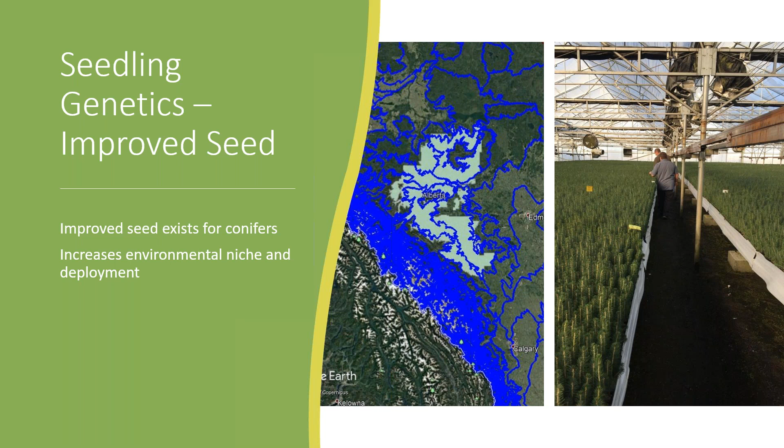Now, site preparation is also very, very key. This is going to help a lot with removing site limiting factors that may exist on the site. One of the key elements is creating microsites, these small sheltered areas that reduce stressors on the seedling, whether from desiccation, or they can also increase moisture levels in the soil.

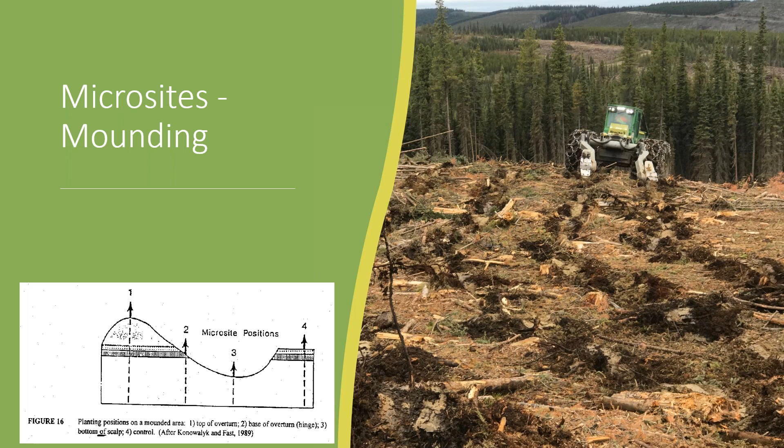Looking at the diagram on the left, point number 2 is where we would be planting seedlings. The mound on the left provides a bit of wind protection, and the depression, number 3, provides a place for rain to collect, infiltrate into the soil, and increase soil moisture levels overall. This is something I've done a lot in the reclamation context, and I find it's quite effective.

As well, coming back to removing competition, I really like these two pictures contrasting it, because in my early days in reclamation, I was always just looking at the grass and thinking that's mostly light competition. And with the snow press, as snow will press tall grass onto seedlings and hurt them, I thought those were my main issues.

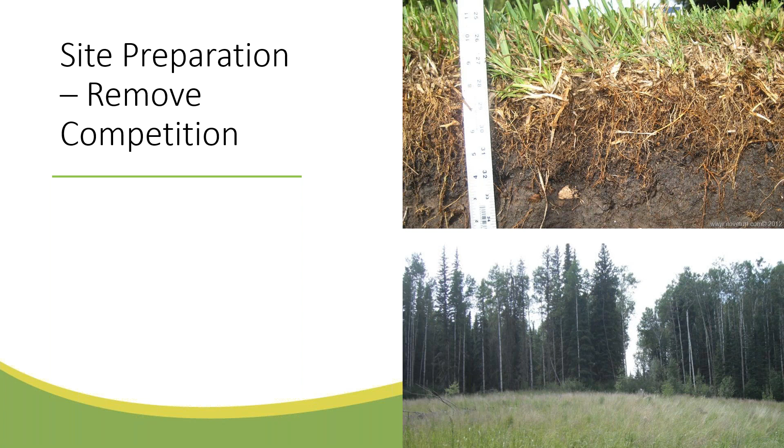But sometimes it's important to think below the ground - how significant is the sod mat? Do I have a sod-forming grass? Looking at that area, there's almost total overlap with the seedling plug. So something very small dealing with a very established root system is quite significant in terms of threatening the overall health of the seedling. So removing sod is very, very important.

Reducing compaction, as I mentioned before, is very important. Thinking about some sites, they can be quite compact, and if it's challenging to put a shovel in the soil, how difficult is it going to be for a seedling to push out its roots to obtain moisture and nutrients. Also, by breaking up the soil, especially in finer textured soils, that allows increased infiltration of water.

And planting design—this is where it can get a bit tricky, and it's going to depend a lot on the knowledge of the person designing the planting, but also the actual planting contractor, because these can get a little bit more complex, and there's a lot more handling and management involved.

But in these sites, depending on how variable they are, how large they are, planting, for instance, conifers in more sheltered areas, especially where snow cover is likely to be lost multiple times during the winter—this is where a lot of the foliage, even though it's dormant, can still become desiccated over the winter.

I was just at a site in the Calgary area where they planted a number of conifers, including Siberian larch. This was on public or private land near Calgary, so not a lot of snow cover in the winter, and the only seedlings that really survived were the Siberian larch. They dropped their needles and then grew them back in spring and were doing quite well, whereas the pine and spruce were actually in very poor shape.

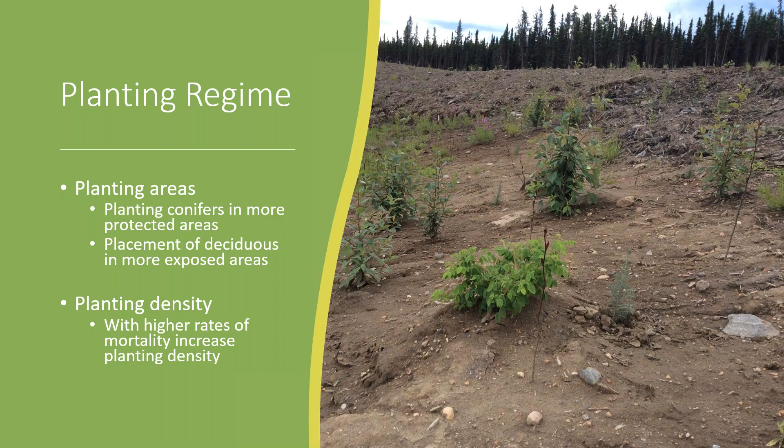Lastly, the timing of project implementation, I think, is going to become a bit more important. Syncing project activities like soil placement and site prep with planting, to reduce the chance of competition coming in, is of greater importance, because as climate becomes more stressful, we need to ensure we're limiting competition as much as possible.

One other point, I think the last one, has always been important, but I think it's going to be more important: comparing summer deciduous planting, so broadleaf planting, to spring. In spring, we're putting in dormant seedlings that have no leaves, and so when you plant them, the leaves are growing at the same time as the roots.

And also it's generally not as hot as summer. Whereas in summer, we're planting leaf-on deciduous, and it's also a lot hotter. So in summer you have these large leaf areas, a higher evaporative demand with higher temperatures, but still that small root mass that's just starting to grow more. So desiccation can be a lot higher, especially when we think about Edmonton, or once again, days over 30 degrees going up at least 4 times more than they are now.

That's what can cause a lot of die-off of deciduous plantings. So planting more in spring if possible, or being a lot more strategic and flexible with when you plant summer deciduous species.

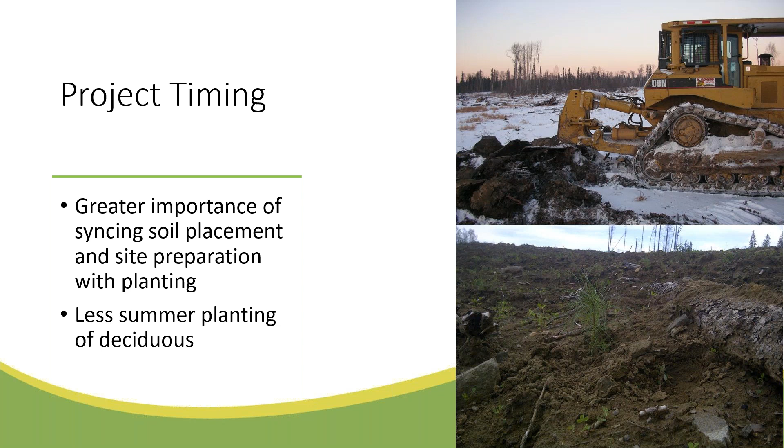So to sum it all up, it's important to understand that climate has changed, extreme weather events have changed, and it's going to continue to do so. How so? We don't know, but it will be changing significantly regardless. With that, we're going to have plants that are adapted to a fairly consistent range of environmental factors, and they risk falling outside of that, whether it's loss of productivity or a complete change of environments. So the importance is to get seedlings to maturity where they're able to tolerate these changes, and we have a lot of options to work with.

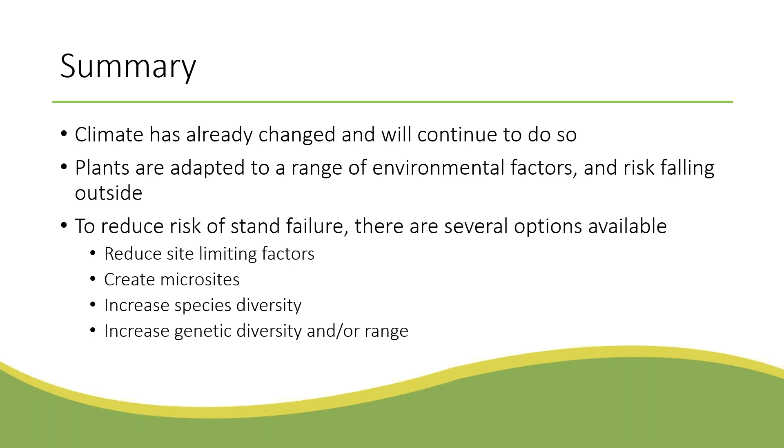So yeah, number of references. If anyone has any questions, specifically on the technical elements, feel free to ask me now or email me on it. Otherwise, I appreciate everyone participating in this presentation.

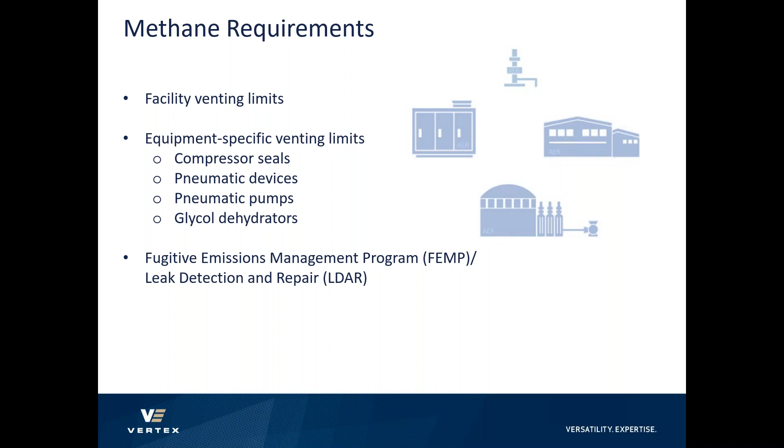I'm going to run through the main differences between the fugitive emissions requirements under the provincial and federal regulations. From an operational perspective, some of the main differences include the party responsible for the execution of a field LDAR program, which facilities are in scope, inspection frequency requirements, approved methods for inspection, the definition of a leak and repair requirements, and the reporting, registration, and record keeping requirements.

After I outline these main differences, I'll provide some suggestions for running a program that's compliant under both, since producers will have to account for the requirements of both frameworks until equivalency has been finalized. At that point, fugitive emissions management programs can be scaled back to comply just with Alberta methane regulations.

Both regs define who is responsible for the execution of a field LDAR program and who's responsible for reporting and record keeping. The AER indicates that the duty holder is ultimately responsible for executing fugitive emissions surveys and screenings, while the operator of record is responsible for reporting all emissions data. This is particularly important when it comes to facilities that are licensed and operated by two different companies.

In these cases, the responsibility for fugitive emissions monitoring might be outlined in the individual operating agreement for that particular site. But either way, the fugitive emissions data has to be reported by the operator of record in the annual methane emissions report that gets submitted to the AER.

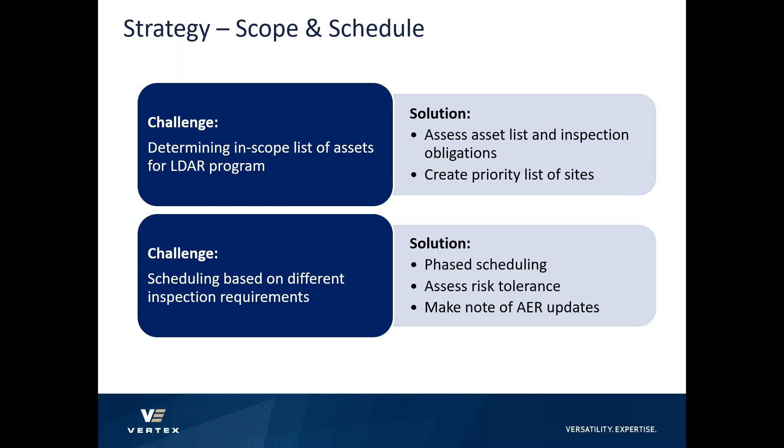It'll also be important in that time period to keep an eye on AER announcements regarding the current suspensions, as they have recently announced that these suspensions might be adjusted to align with the direction of the stage 2 relaunch, which is starting tomorrow in Alberta. So this phased approach of scheduling sites based on current requirements can be a good strategy to remain compliant while also giving producers the best chance to avoid unnecessary work and expense as requirements continue to evolve.

We saw that both regulations have different reporting and record keeping requirements. This can cause challenges in knowing what data needs to be collected in the field. So a strategy for maintaining data effectively and managing what you need to collect is to develop a compliance-based data collection template for field crews to collect everything necessary for compliance with both regs.

Another option is to consider working with a software provider who has a mobile platform or app that aligns with these record-keeping requirements to streamline the process of collecting data in the field.

In addition to emissions data, there are some equipment inventory requirements under both regulations. So in order to ensure that you have everything you need and to avoid duplicating work, going through your current equipment inventory to assess where any gaps might exist can allow for a short list of equipment inventory to be collected while an LDAR crew is already out in the field.

I briefly mentioned the option of conducting an alternative LDAR program. Under the federal regulation, repair verifications have to prove that any remaining release has a concentration below 500 ppm of hydrocarbons using a method 21 device.

Doing this can essentially double the cost of an LDAR program, assuming there's one leak at each site, because you'd have to have a follow-up survey come back to verify repairs after they've been made. And the AER does not prescribe a method for confirming repairs.

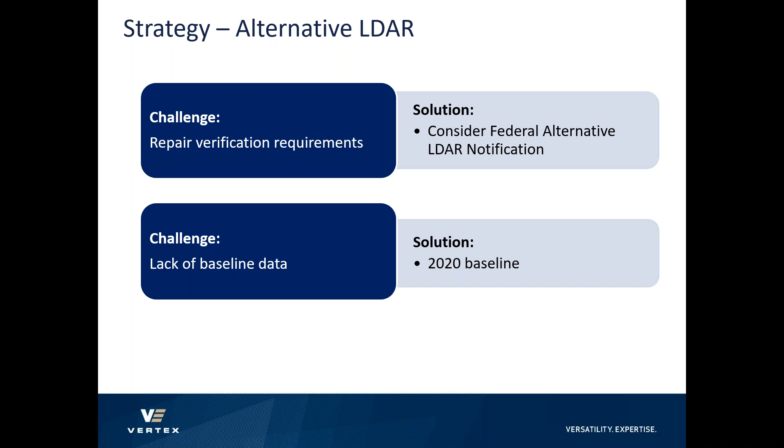One of the most obvious challenges with these new methane regulations is the added cost of compliance, given the current economic state of the industry. A few strategies for using resources as efficiently as possible are outlined here.

First, considering a collaborative approach with other producers, taking a look at other operators who have assets in the same area and planning to share resources, whether that be hiring the same LDAR vendor for the same trip or collaborating on an alternative technology investment.

At Vertex, we have a number of clients who have operations in the same areas. So we work under an area-based LDAR approach, similar to the way in which some producers are conducting site closures in Alberta.

This reduces the cost of mobilization, which can be a fairly significant portion of the cost when driving to all of the active facilities in the province. Another strategy is to take advantage of the fact that you've already hired a consultant to visit all of your active facilities to do LDAR surveys, and while they're out there, you could consider having that vendor collect equipment inventory that might be outstanding.

Depending on the vendor, they might also be able to conduct other required emissions testing while on site, like annual compressor seal vent testing, MSAPR engine emission checks, surface casing vent flow testing, gas migration, or gas sampling. Again, depends on the vendor. They might also support your required reporting if they have a strong understanding of the regulations, which could reduce any duplicated work in managing your emissions data.